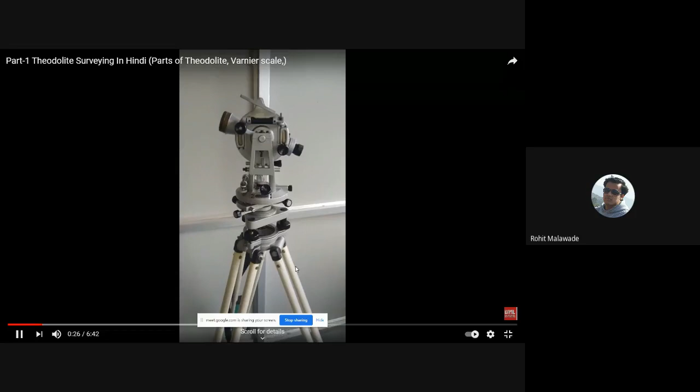Now you can see these are the three tripod legs. From this, your theodolite is going to be set on the ground level. So we call this the tripod.

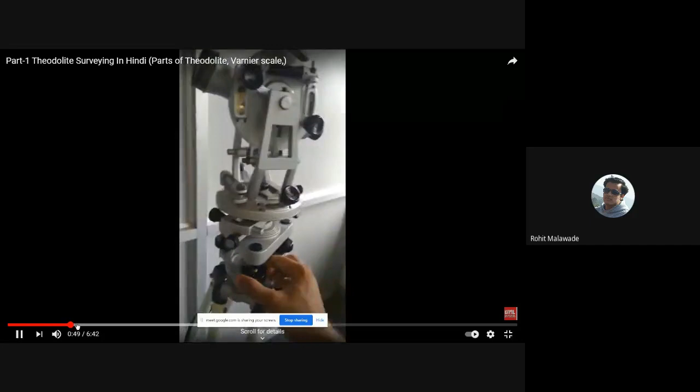This is what we call the foot screw. These three elements are for leveling, and you need three screws for that. These are the screws A, B, C which are available to you. From these, you are going to level the instrument. One, two, three - there are three foot screws, and from these you level the instrument.

So on this tripod, your instrument is going to be set down. This theodolite is set on this particular tripod, which has three legs and is placed on the ground level.

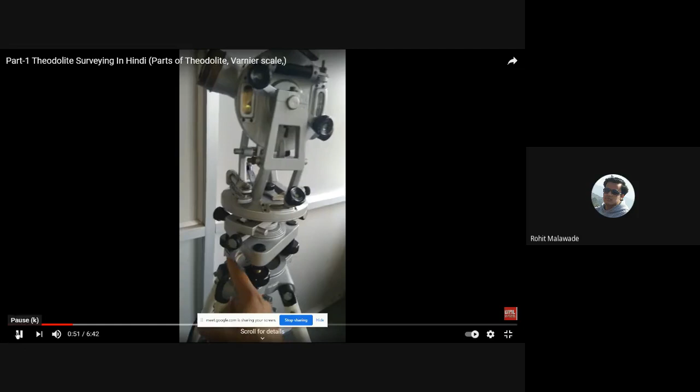These two particular plates - we call this the tribrach. This is the lower plate and this is the upper plate. We call these two levels the level head - the upper plate and the lower plate.

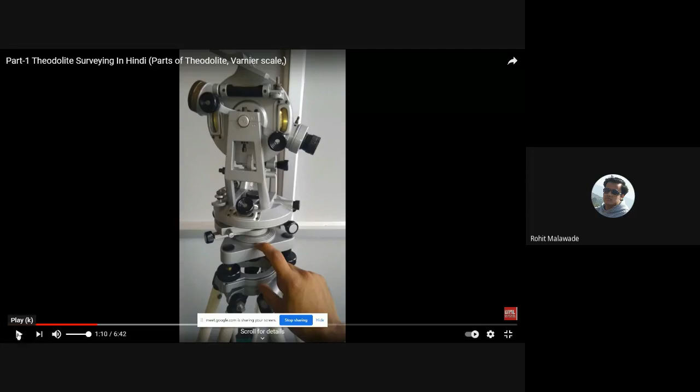This is your upper plate of the theodolite, and this is your lower plate. Now, on the lower plate, what is there? Can anybody reply? What is there in the lower plate? Lower screw? Horizontal circle main? Yes, horizontal circle - that is what we call the main scale reading.

On the lower plate, we have the horizontal circle, which has the main scale with angle markings. This line you see is nothing but your lower plate or lower circle. We call it the lower plate or horizontal circle. This upper section we call the upper plate. The lower plate has angles marked from 0 to 360 degrees.

The upper plate has two verniers - this is vernier A and vernier B. It has the vernier scale reading. On the main scale, you read the angles in degrees and minutes. And for better accuracy, we utilize both verniers. You can see these two verniers are for accurate reading.

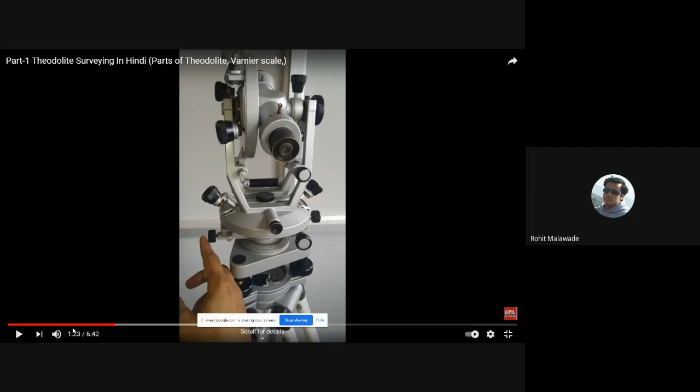Okay, just a minute, we will see the different parts again. This is your upper screw, this is your lower screw. The upper screw controls the entire telescope, including vernier A and vernier B. So the entire upper part of your theodolite moves from the upper screw, and the lower screw controls your main scale. Okay, we will see the different parts.

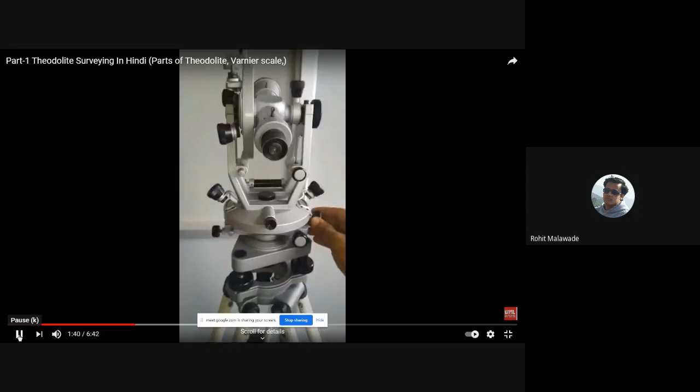If I tie the upper clamp and lose the lower clamp, the entire instrument is going to move. Now, if I lose the upper clamp and tie the lower clamp, only the telescope is going to move.

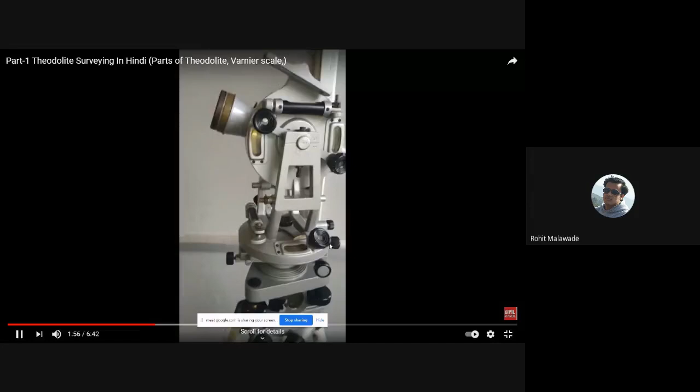Now he has tightened the lower clamp and opened the upper clamp. Now you can see the entire telescope move. This shows that if you lose the upper clamp, the entire telescope, or the entire theodolite, is going to move, including vernier A and vernier B, the telescope, and the upper circle. Okay, now we will see the other different parts.

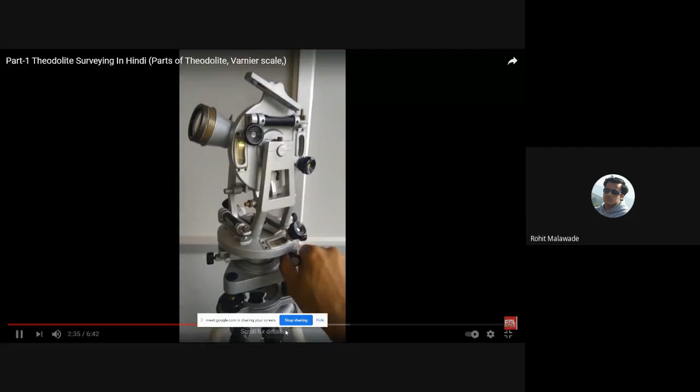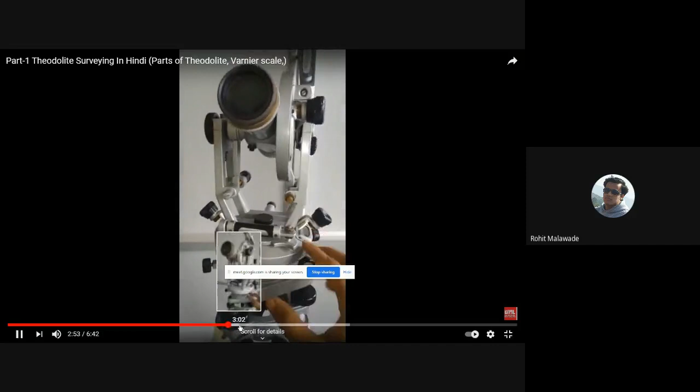This part is your level tube. If your instrument is leveled properly, your bubble tube will be at the center. This leveling you can control with your leveling screw. This is your level tube, and we control it with the help of the level screws.

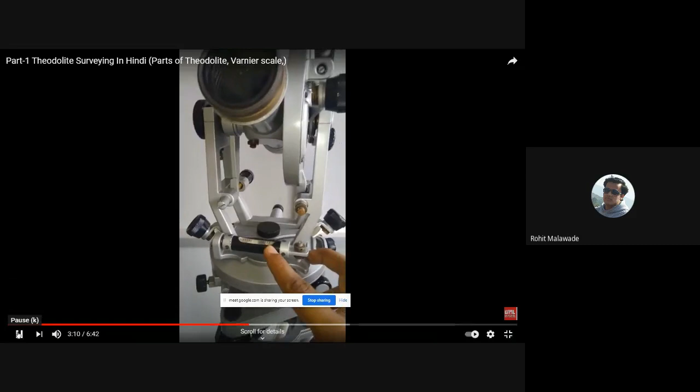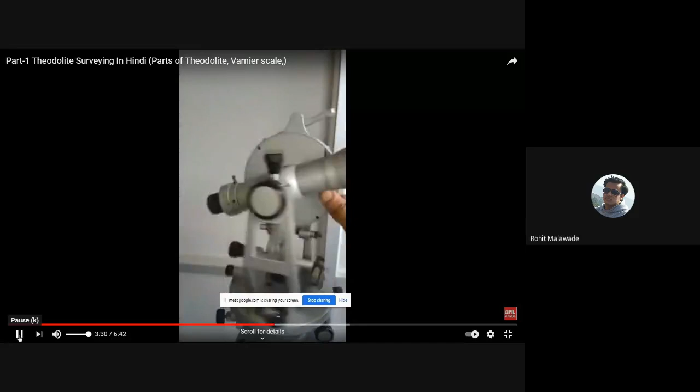Now this part is your vertical circle. It has two scales, main scale and vernier scale. The main scale measures the angles, giving the main scale reading. Vernier scale is there on your theodolite to measure the accurate reading, giving an accuracy of 20 seconds.

This is your vertical circle, and there is one more level tube for leveling the upper plate or vertical circle. This is your vertical circle, this is your horizontal circle. In order to have proper leveling of the vertical circle we use one more level tube, and these are vernier A and vernier B, vernier C and vernier D, for measuring the accuracy of your vertical scale or vertical circle.

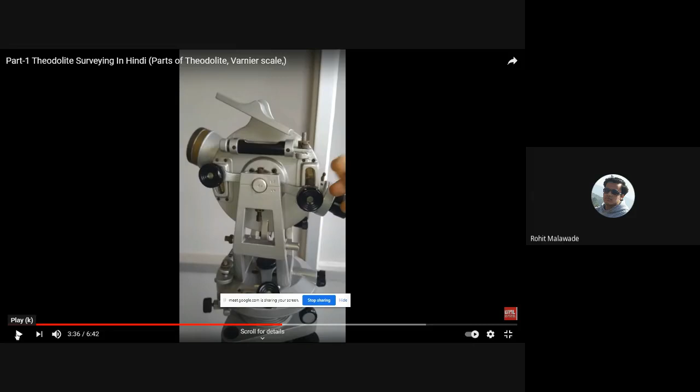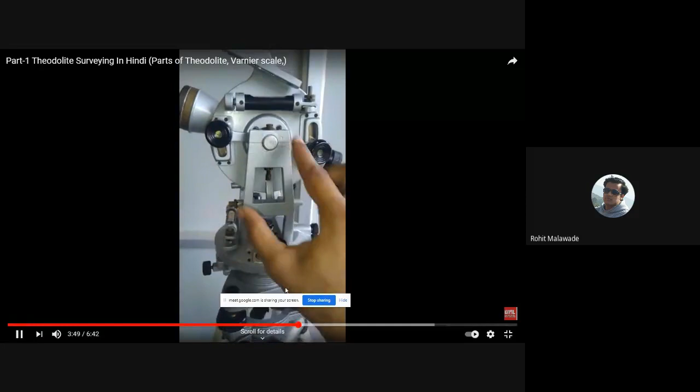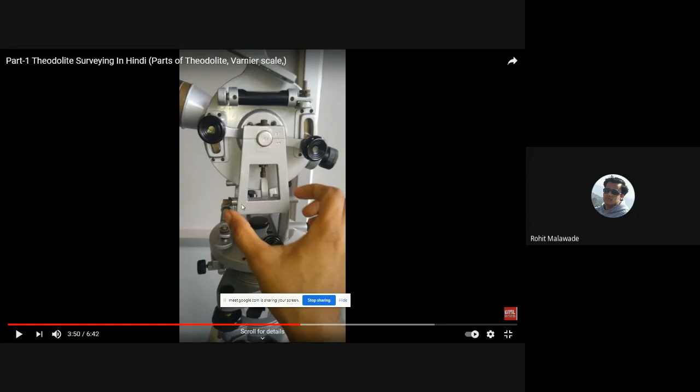This we call an A frame. On this A frame, the entire vertical circle or entire theodolite is present, so we call it an A frame.

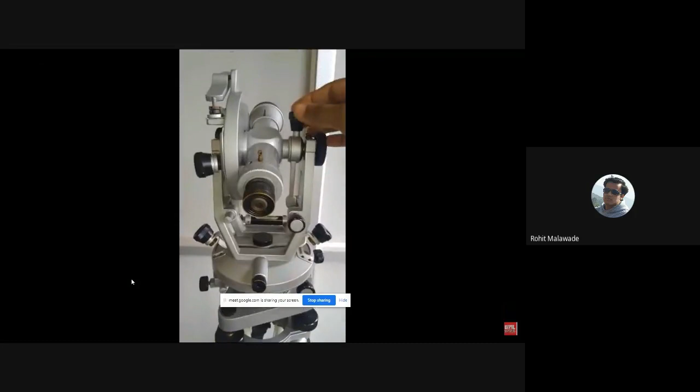This is what we call a vertical clamp. For the horizontal circle we were using the upper clamp and lower clamp. This is your Trunnion axis. If I loosen this, the entire telescope can be rotated, or transited, whatever we are going to do - we are going to have the transiting of your telescope. We can do it with this vertical clamp.

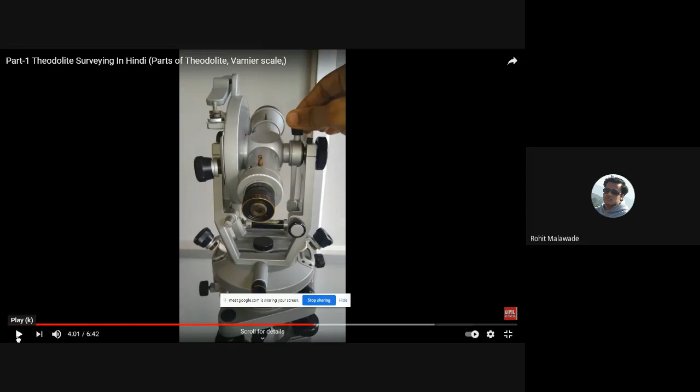See, he has loosened it, and it is freely moving up and down. See, he has tightened it and now it is not moving.

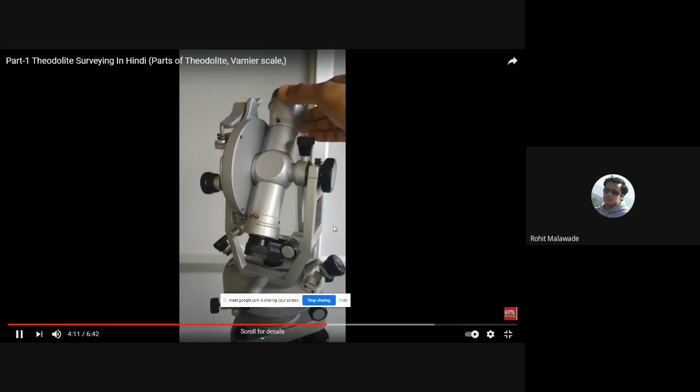This we call a tangent screw, for having fine adjustments. We will be rotating it to do the fine adjustment.

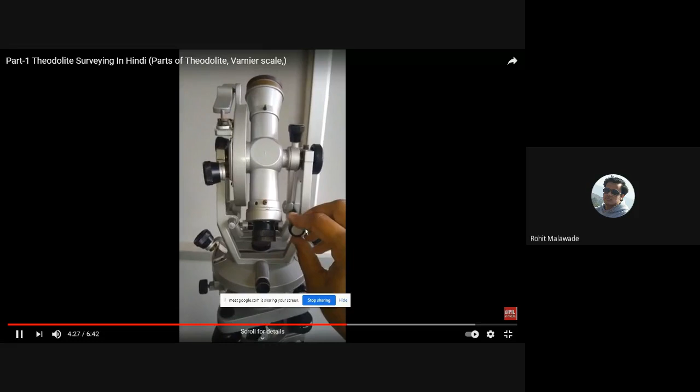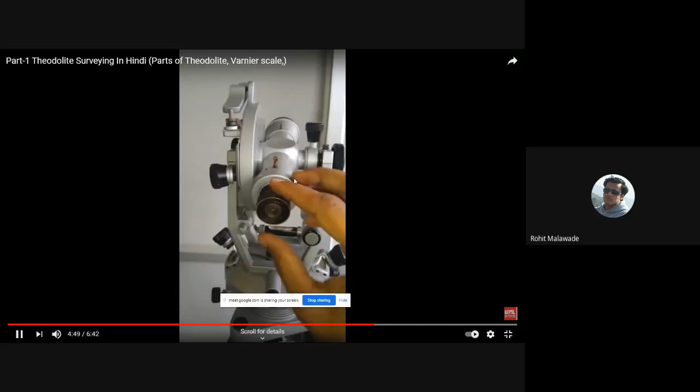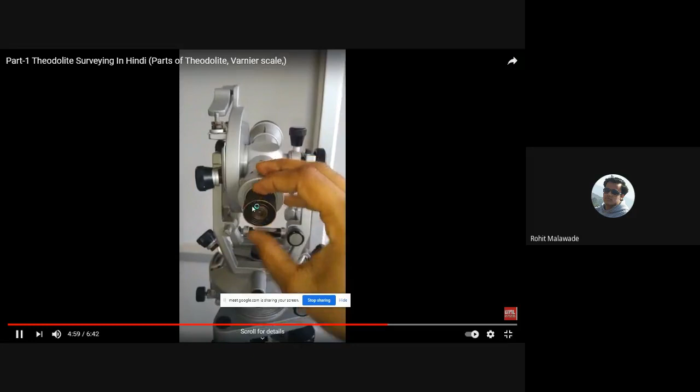This is your telescope. This is your eyepiece and this is your objective piece. See, he is doing the fine adjustments by rotating those, and the objective is used to focus the object. The eyepiece is used to focus the cross hairs.

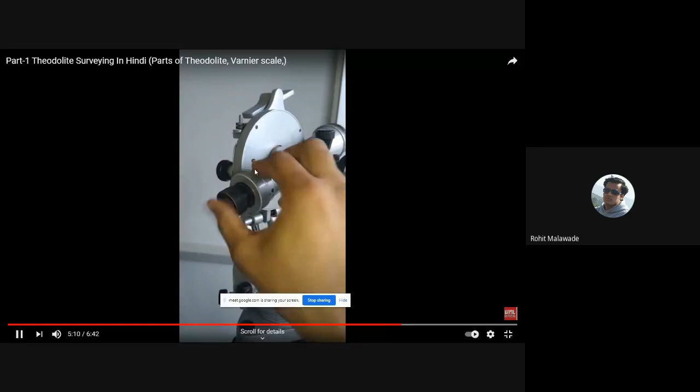This is the gun sight. If I want to bisect an object, I will be using these gun sights. Suppose an object is there, it has to be roughly bisected first using this, and then we are going to bisect it with the telescope.

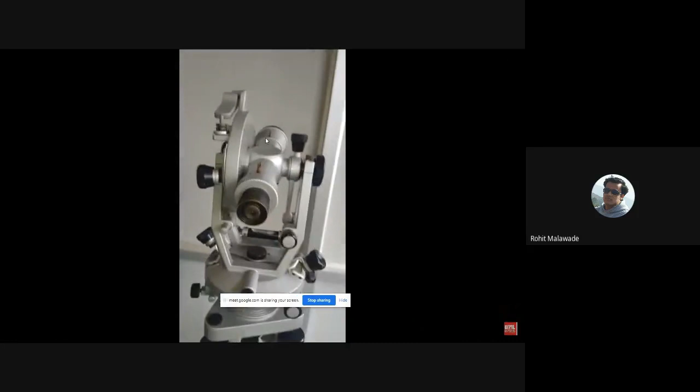He is explaining about the bubble tube now. This bubble tube you are going to use for centering your vertical circle.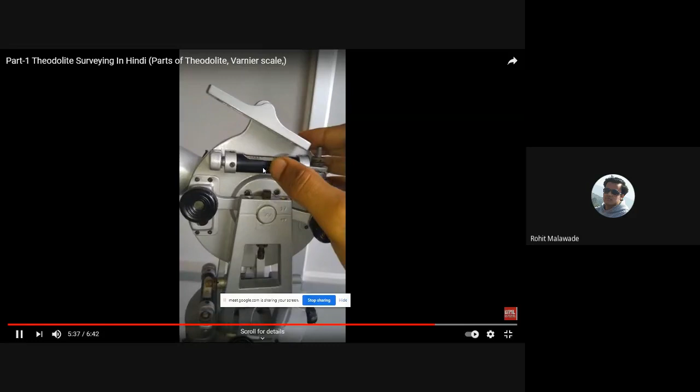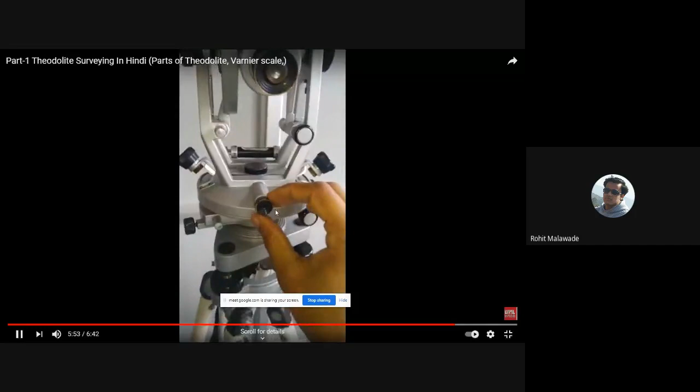This particular point we call an optical plummet. As I told you while explaining centering, using this optical plummet we will be transferring this vertical axis. We are going to transfer it onto a station point by observing through this optical plummet.

So I hope the things are clear to you. Yes sir, yes sir, things are clear. You have seen the exact theodolite - if we cannot, we cannot be in college, we can see the things on YouTube which is there. I can show you exactly how the theodolite will look like.

So I will explain once again. This is your vertical clamp. From this clamp, you can move the telescope up and down. This is your vertical circle. The vertical circle has two scales, vernier C and D, giving fine correction or fine angle measurement. If you want too much accuracy, you should use those vernier scales.

This is what we call an A frame - the entire theodolite is mounted on your A frame. This is your level tube, it is going to measure and see whether your theodolite is exactly leveled or not; it has to be centered if it is leveled. These are nothing but the foot screws - on three sides we have the three screws. I have told you how to level, right? And this is your upper plate, this is your lower plate. The upper plate will be having the two...

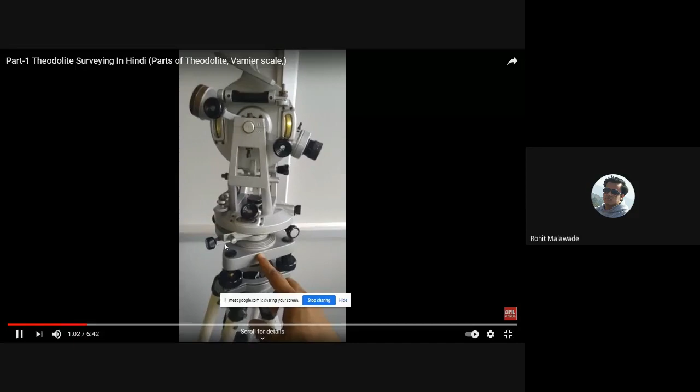It is going to have the two verniers, vernier A and B. Vernier upper plate is also going to have vernier A and B. Vernier A and B is for the accurate readings. This is your vernier B, vernier A, and opposite side you are going to have the vernier B.

So it can give you the accuracy of 20 seconds. On a main scale, you can read the angles in degrees and minutes. On vernier, you can measure that till the accuracy of seconds.

So you are going to have the upper clamp and the lower clamp. This is your upper clamp.

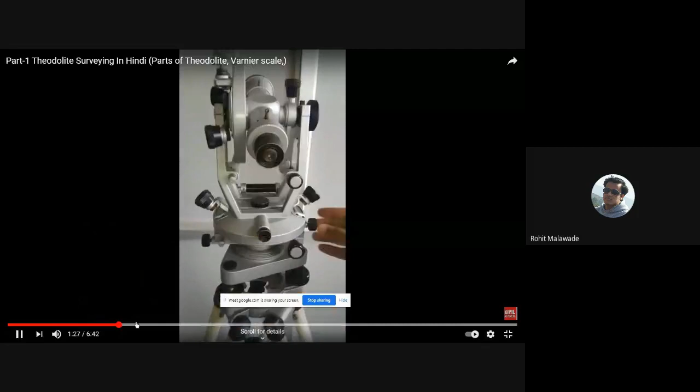Is it clear? Yes, sir. Have you understood the many aspects? Yes, sir. Is there any doubt? No, sir. Are you happy the way I'm explaining? Yes, sir. So I hope the things are clear to you.

If any doubts are there, please let me know. Please let me know if you are having any doubts. Do you have any doubts? No, sir. I hope the things are clear to you.

Now we will see measurement of what we are going to study in the next class. What we are going to study, that we will be seeing.

My screen is visible to you all? Yes, sir. Okay.

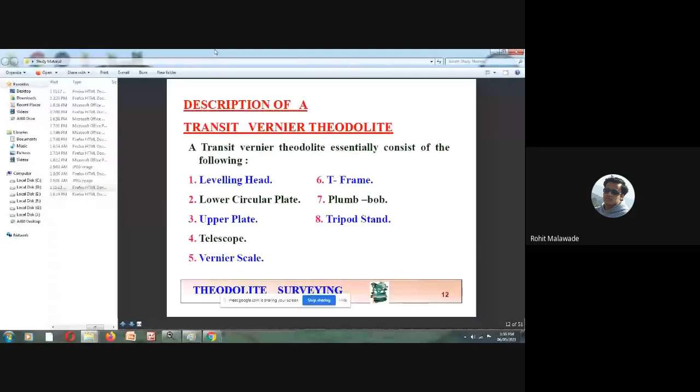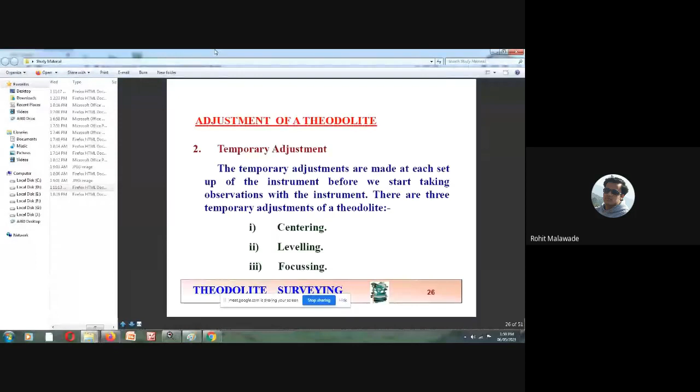We still need to measure, we need to see measurement of the permanent adjustments in our next classes. In tomorrow's class, we will be seeing the three methods of how we are going to measure the horizontal angles: by ordinary method, repetition method, and reiteration method. We will be seeing how to measure the angles by these methods, and also we are going to see measurement of vertical angle.

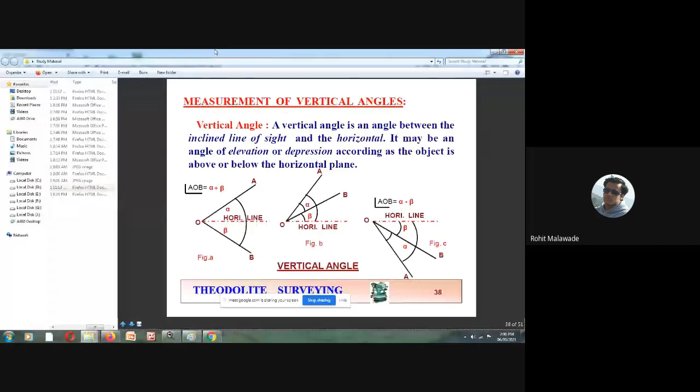So in tomorrow's class, we will be concentrating our study on measurement of horizontal angle by three methods: ordinary method, repetition method, and reiteration method. By these three methods, we are going to see how to measure the horizontal angle.

Shall we end the session or shall we continue the measurement of horizontal angles? Next class, sir. Okay, we will take this particular measurement of horizontal angle in the next class.

Within next week, we are going to finish module 1. We are going to complete module 1 in the next week. So we will meet and learn the measurement of horizontal and vertical angle in tomorrow's class. Possibly we are going to cover only the horizontal angle in tomorrow's class.

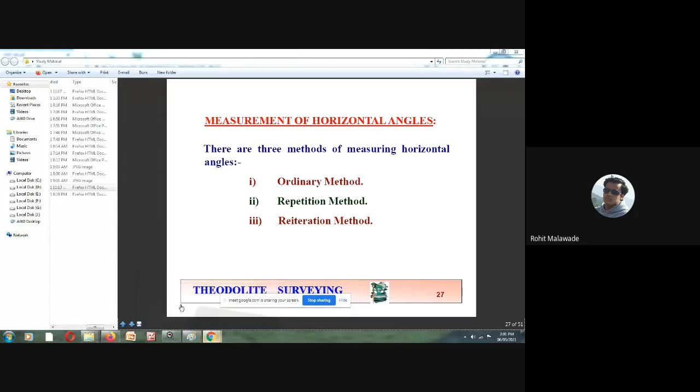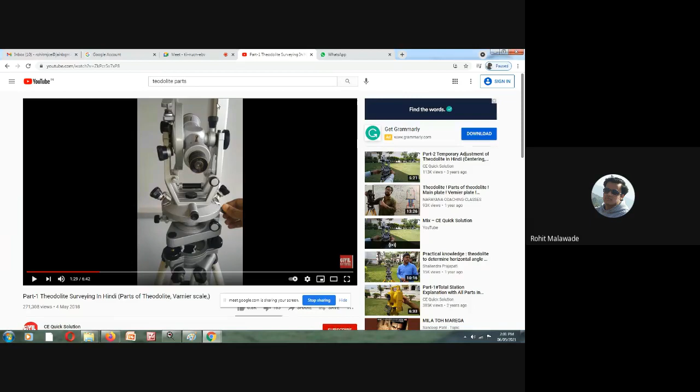What is A-frame? A-frame is a supportive element to your entire theodolite. Your entire telescope, your entire theodolite, has been supported by your A-frame.